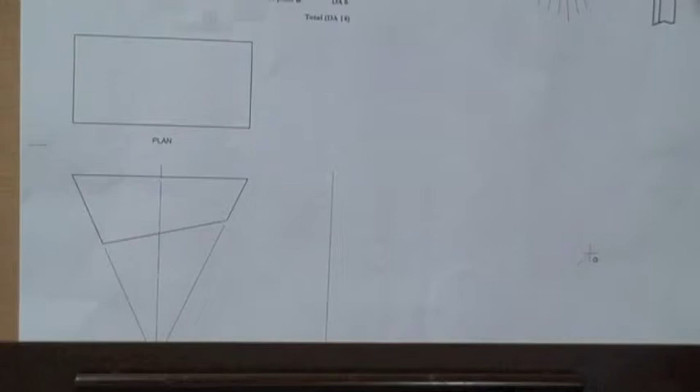Question number 2. First thing we have to ascertain is that this is a pyramid, and the pyramid is turning upside down.

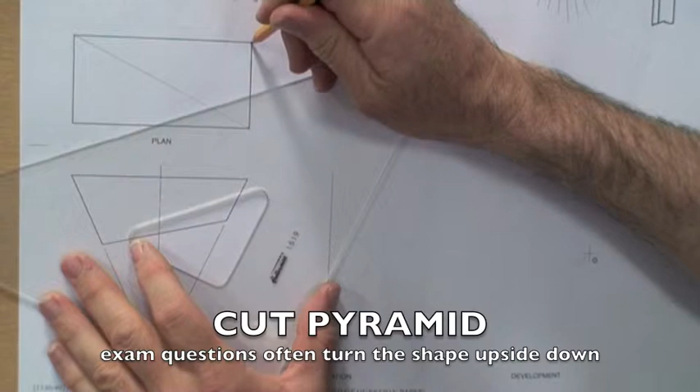We need to draw in where the centre, apex of that pyramid might sit, so with a degree of accuracy we need to line up corner to corner to find that the centre sits in that position. This is slightly off in this particular drawing.

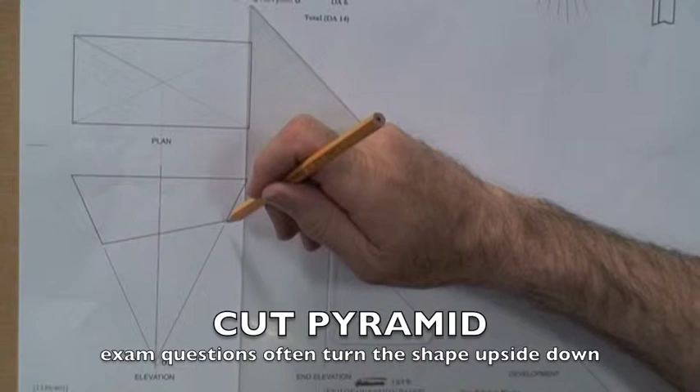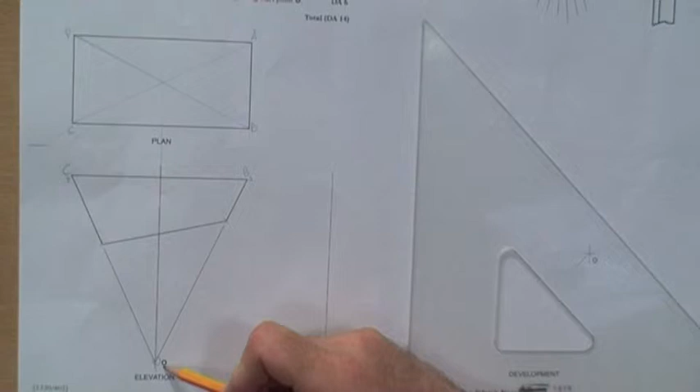From what we can see, it has been cut in these two positions. I'm going to call this A, B, C and D. In this view, the nearest to me is B, behind that is A; the other nearest is C, and behind that is D. I'm going to put O for the apex in each case.

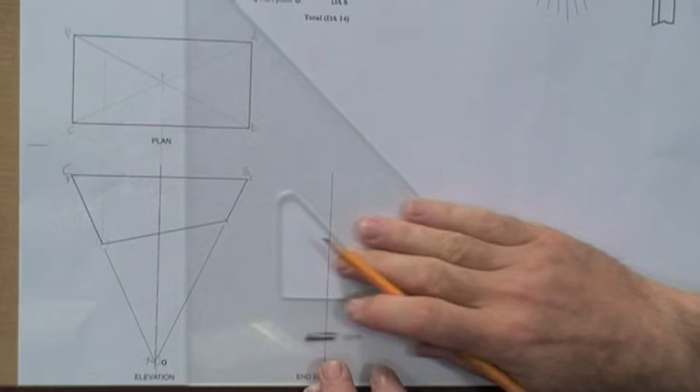We've simply got to start by completing the plan. Let's look to see where the ridge is cut. This ridge is cut in this position, so pencil on, slide the set square across, project up - 2 points of contact.

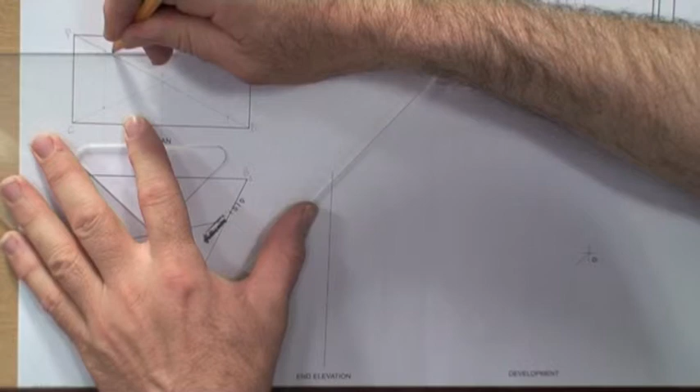B and A are also cut in this position, so B and A are cut as so. We can then join up.

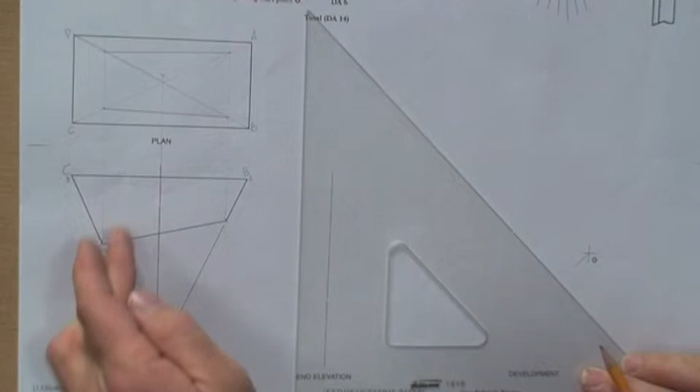In this case there is a slope between the two. They do not line up, so we have to make sure we use instruments to find that slope. These cuts are vertical, so we can use the parallel motion and the set square to find the corresponding edges.

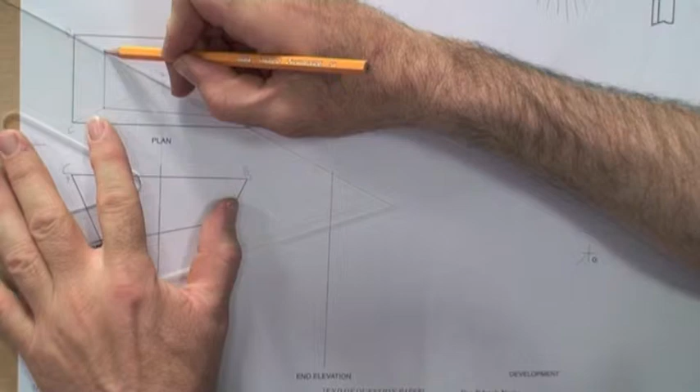The drawing's not finished. These lines still need to appear up here, so we now need to firm in the internal corners of this cut, hollow, rectangular pyramid.

It's cut - this has been removed. It's hollow to allow the light to come out. It's a rectangle and comes down towards a point, so it's a pyramid.

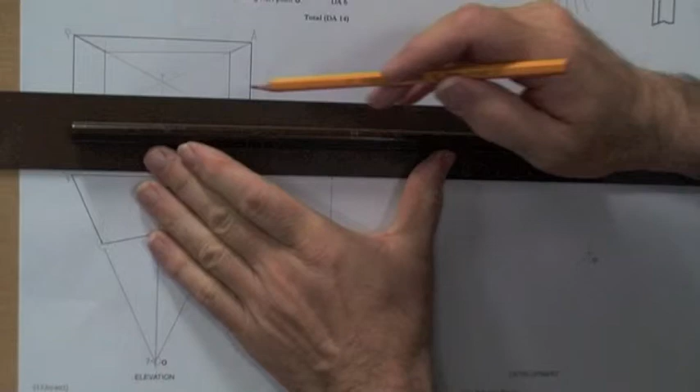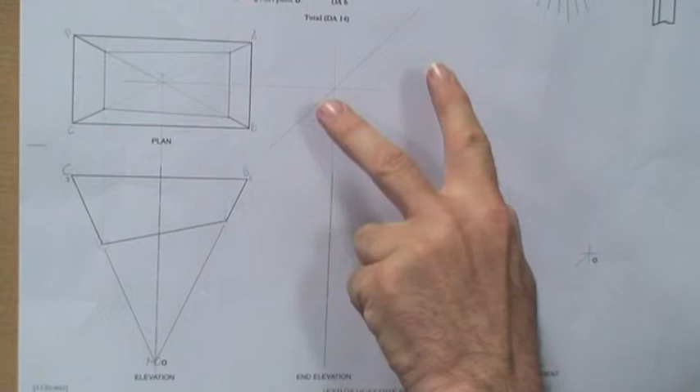For the next part, I'm going to take the centre and project across. We already have a centre line on page ready for us for the end elevation. In this case I'm going to use a 45-degree bending line to project the distances front to back, across and down. The heights I can project from the elevation.

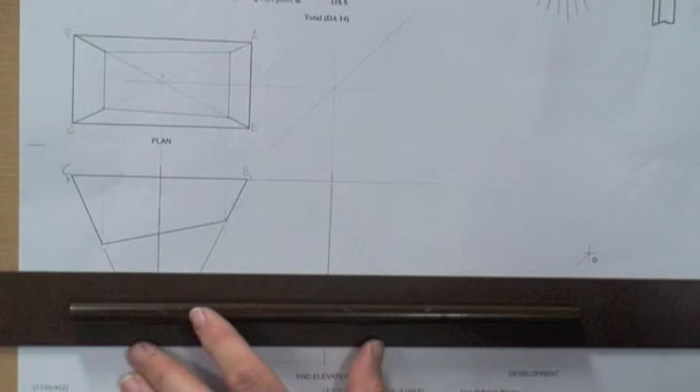First of all, nearest to me is going to be A, behind is D; nearest B, behind is C. So I can take these 2 points and project them across to my 45-degree bending line.

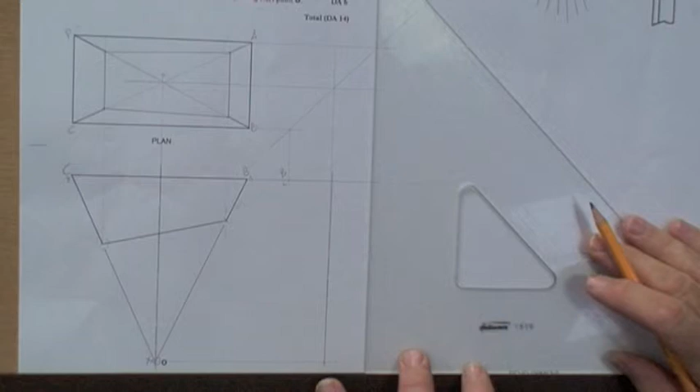I'm now going to take that point and project it down to the correct level. Nearest me is B, behind that is C; in this case nearest to me is A, and behind that is D. These points go down to the apex.

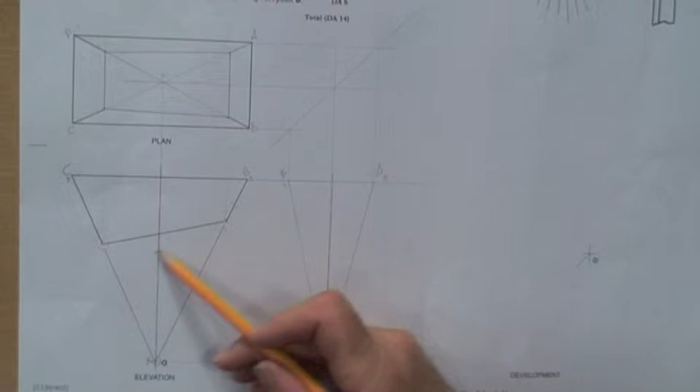If this was complete, that's what we'd see, but this has been removed, so let's look at the places we have the nearest cut.

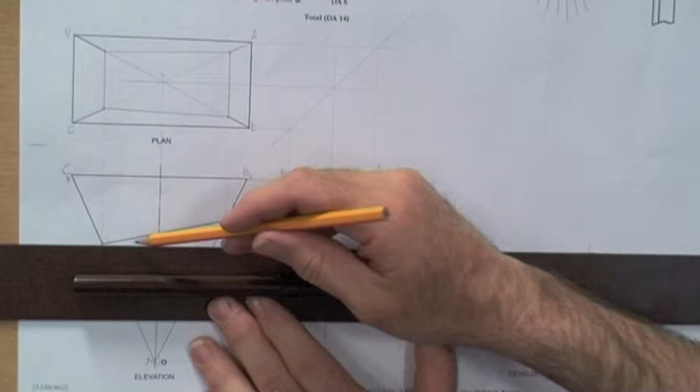B and A are cut from B to A, so across from B to A. Our next cut is on ridges C and D, and I can project that across between C and D.

All that remains now is to firm that end elevation in, remembering that this has been removed. Also important to put the base, or in this case the top, in place.

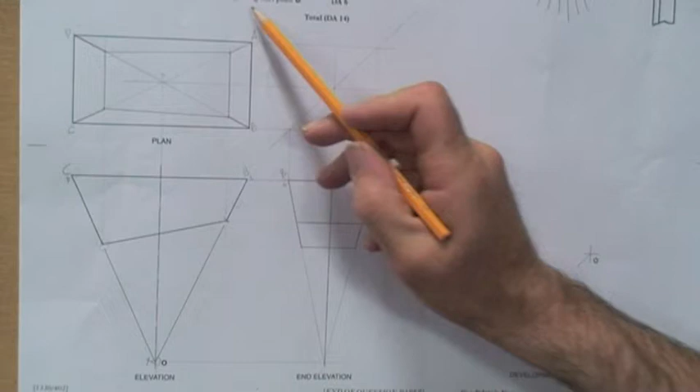The next one asks us for the development of the sides of the lamp. Now the development of this side is sloping not just sideways but back, so we're going to have to find the true length on these ridges. At the moment this one is sloping both sideways and out - we need to have it flat.

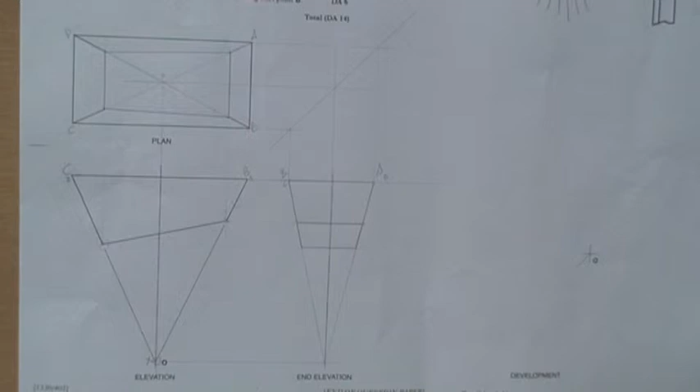To do that we're going to use a technique taught in class, which is to take a corner and rotate it round to the centre plane, that's through the origin. There is a centre plane - that's the base point projected to the centre plane.

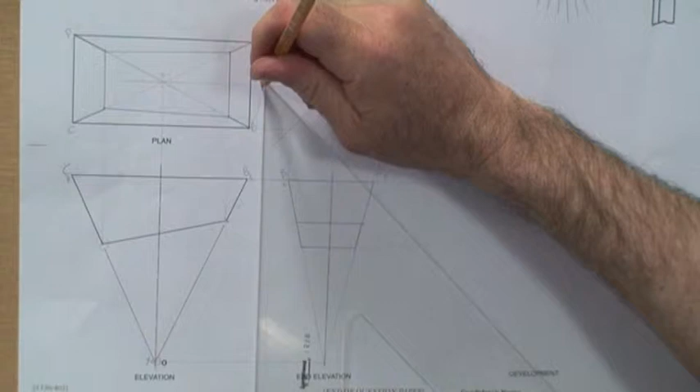We're now going to project that to the base, and in this case the base of the pyramid is here - apex, base. This should give us a true length line.

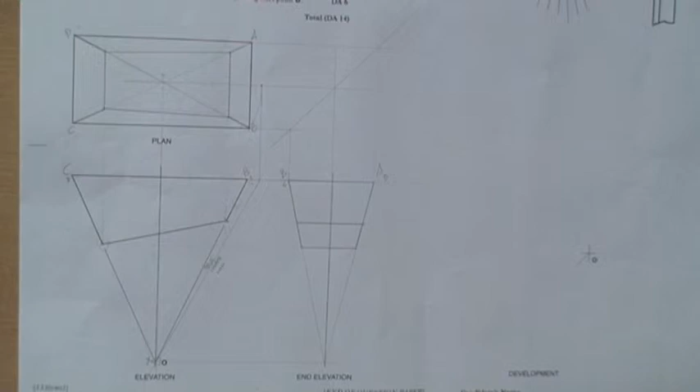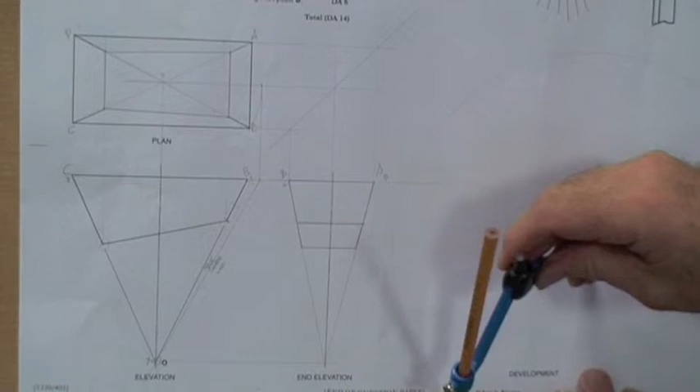We need the true length line to draw the development, so we put from the apex to the end of the true length line, starting at the given point. We're also given a little hint that we might fit one in as a starting point here.

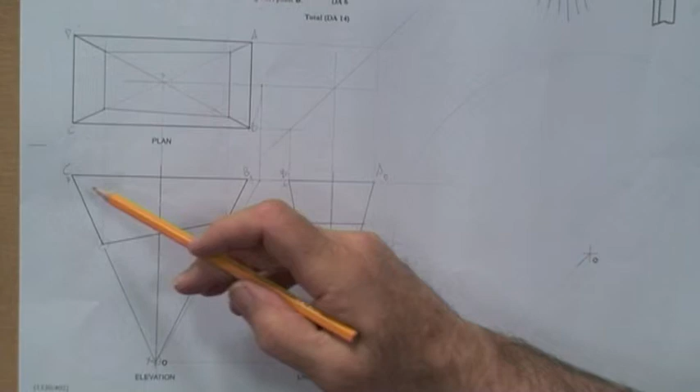We now have to get the distances between each of the faces. This is rectangular, so I'm going to start at B and move around in that direction, from B to C.

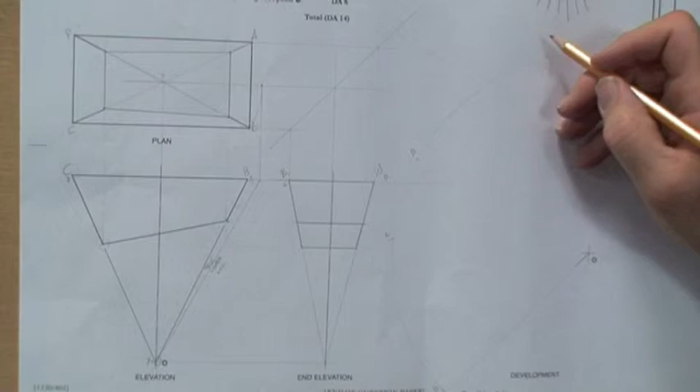Then changing from C to D. From D to A should be the same as B to C, so this is to A now. And I have to close it back over, from A to B.

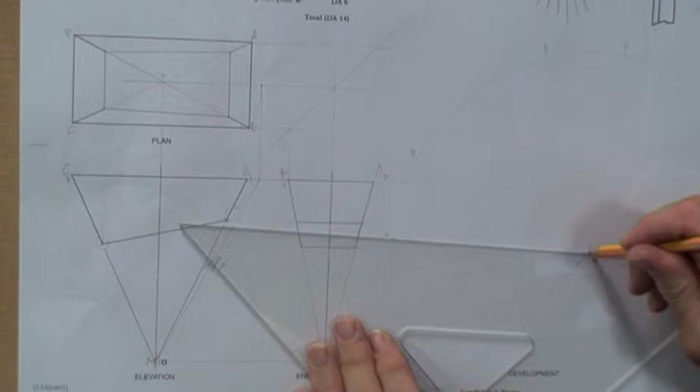We can now draw in the ridges, the true lengths of those ridges from apex, marked O in the exam question. Start on the apex, lining up on the point at the far end, drawing the line.

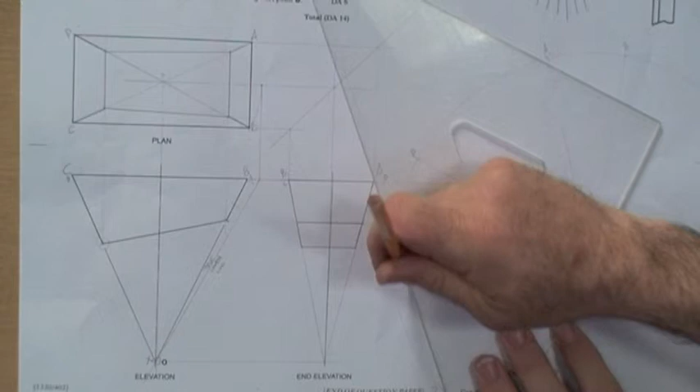Now this gives a curved base - this does have a curved base. We can draw in the base straight edge for each of the pyramid points. Remember, this pyramid is upside down, so I'm talking about bases of the pyramid - the pyramid's base is up at the top.

That would be the surface development of the complete pyramid, but it's not a complete pyramid. We now have to find where these cuts are.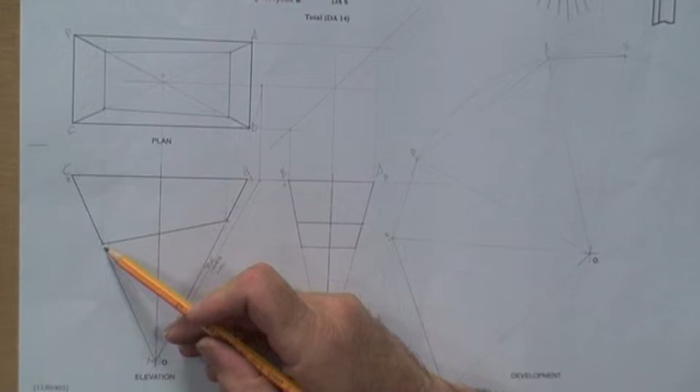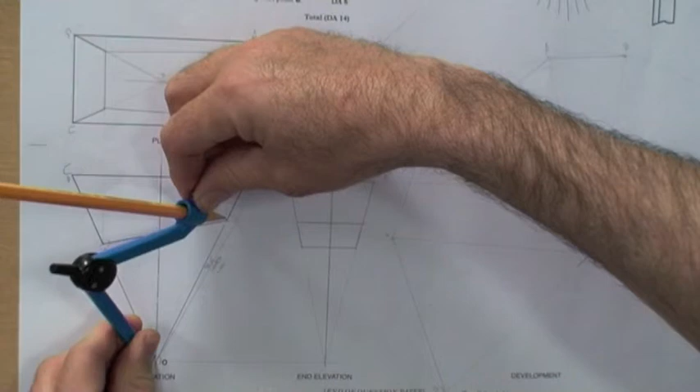The cuts are not true in this view. The cut has to be projected onto the true length line, and we have 2 points at which the true length is cut. So taking the compasses, starting from the apex to B, I can put on the apex to where it cuts B on the true length line - not B in the object, B on the true length line.

B can now be marked on. B is also around the other side as it closes up, but it's not just B that's cut there, it's also A, so I can mark on A as well.

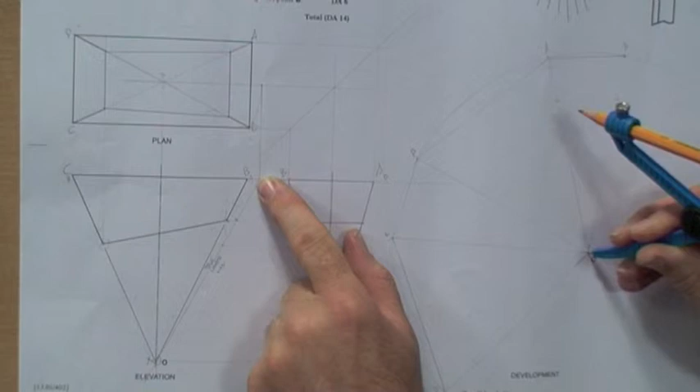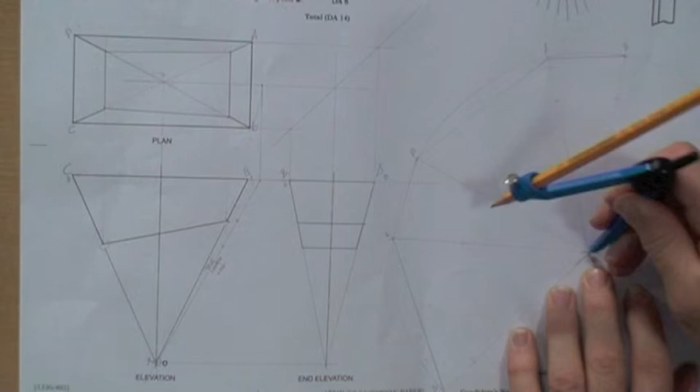The next part that's cut is C and D. Compasses on the apex, bringing down on the true length line, so we can measure from the apex again on the true length line, marks on that ridge. The resulting shape...

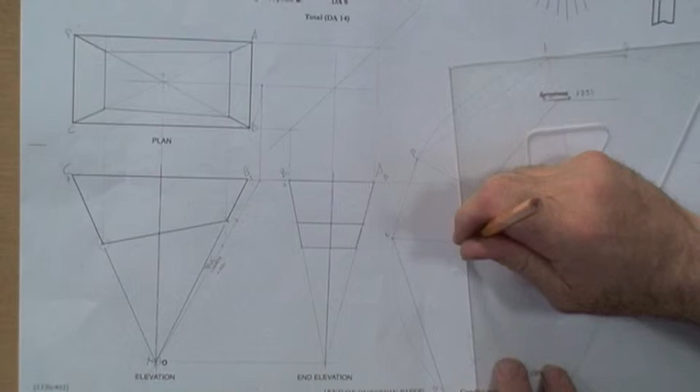And this is where some simple, avoidable mistakes happen. Which bit am I left with, the point or the base? In this case, it's the base area - this is the part I'm left with.

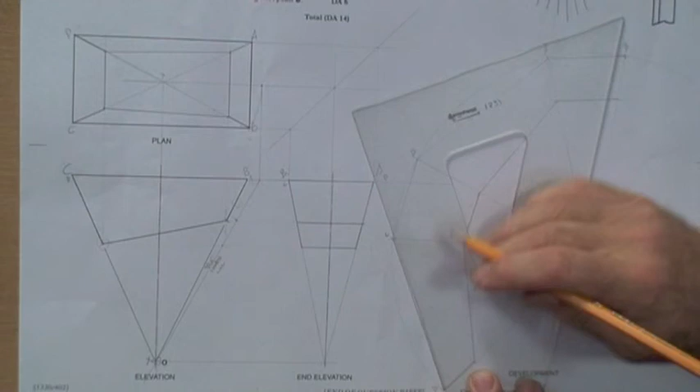So when I firm in, I need to firm in accurately, carefully, on top of my construction lines.

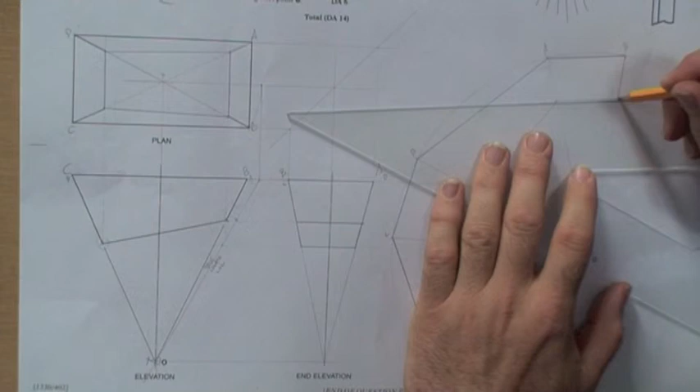To complete this drawing, we still have some lines to go in. We're asked for the development of the sides of the lamp, not the base, nothing internal, so it's just this part. However, we also have to do in a development is to add where the bends are going to go.

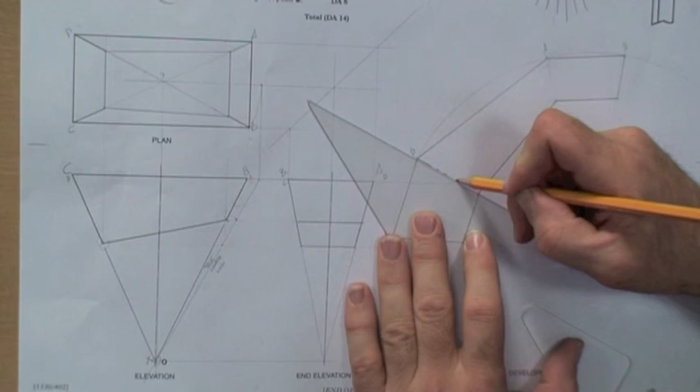In this case, the bends or folds appear as a fold line: double dash, long line. Fold line, long, double dash, complete. Last one.

Plan, end elevation, surface development, true length line.